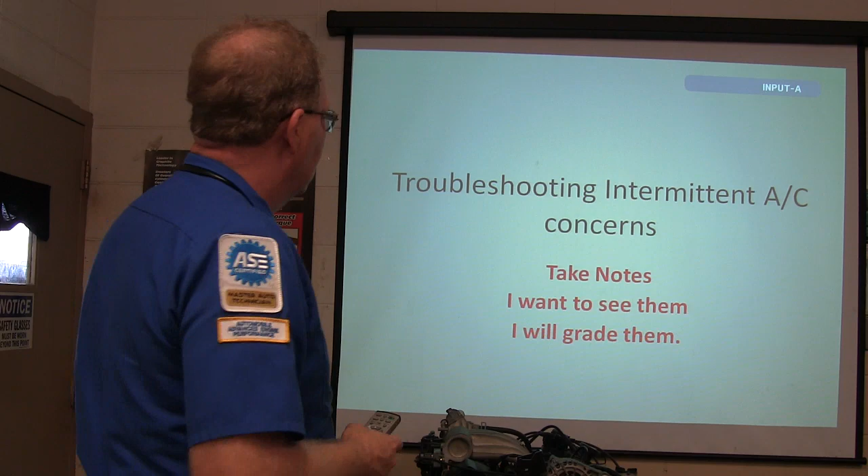This is air conditioning day, so we're talking about troubleshooting intermittent AC concerns, a lot of little tips and tricks and all that.

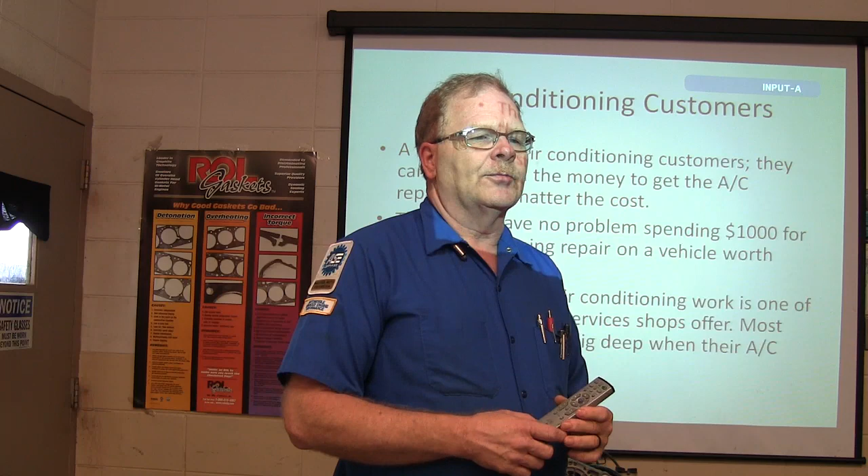The thing about air conditioning customers, they can always find the money to get the AC fixed. You know what I'm saying? Typically, they often have no problem spending $1,000 for an air conditioner repair on a vehicle worth $800. Now, the bottom line is air conditioner work is one of the most profitable services shops offer. Most customers expect to dig deep when their AC system acts up. Now, we don't want to ream people out for the bill or anything like that, but for the most part, people want their air conditioner working, and you can fix their AC.

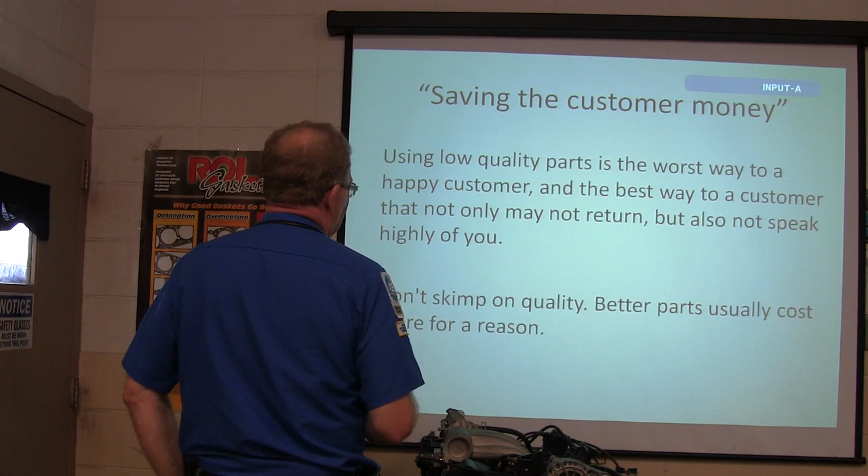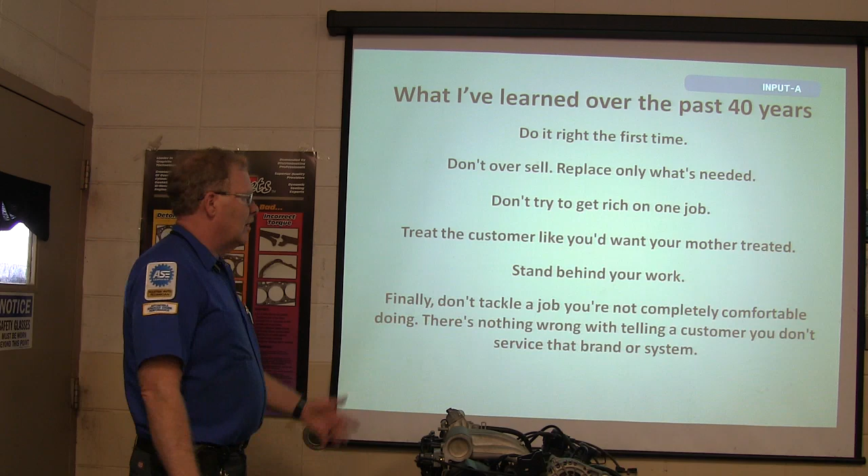Now, do it right the first time. Don't oversell. Replace only what's needed. There are some people that want to replace every doggone thing on there, just to make sure that they cover themselves. Don't try to get rich on one job. Treat the customer like you want your mother treated. Stand behind your work. Don't tackle a job you're not completely comfortable doing. There's nothing wrong with telling a customer you don't service that brand or system. Just don't be afraid of that.

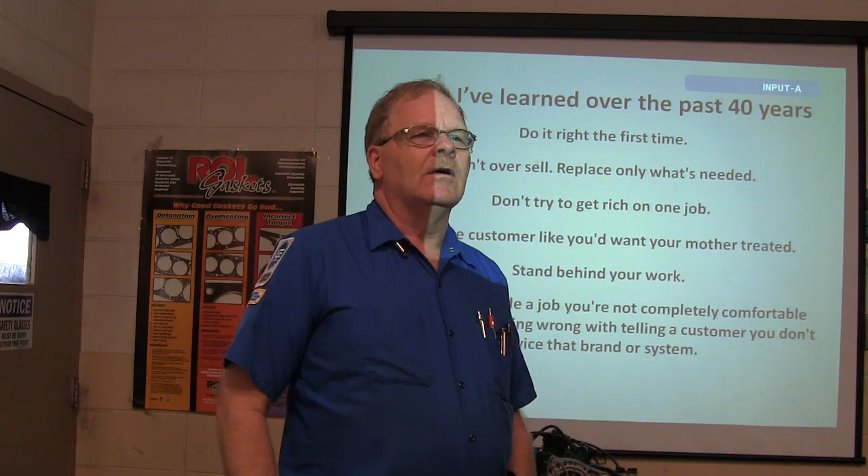Here's something else. If the air conditioner has a leak, I have never seen one get better. It's not going to stop leaking until somebody fixes the leak, right? So it ain't going to get better by itself. Also, if you want to make sure that you're going to have trouble with your air conditioner, spend a heck of a lot of time in a hot parking lot idling with the air conditioner on. It's a bad scene, it's hard on the system.

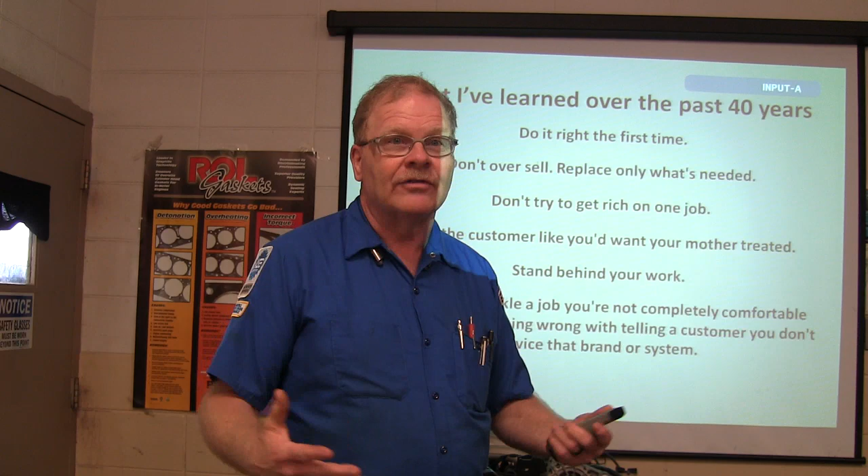People are still writing. Note takers are good, they are our friends. Katie, did you write 2 words?

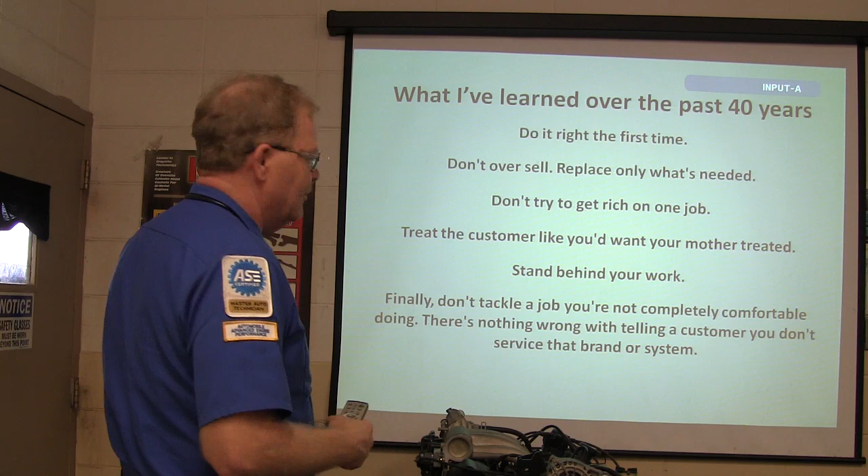All right. Well, none of us know what the future of automotive air conditioning will be, but you can bet air conditioning will be a part of transportation for years to come. That R-1234yf refrigerant is coming out on a lot of new cars now. And it's really expensive. You got to have different equipment to use with it, and it works a slightly different way, and so on and so forth.

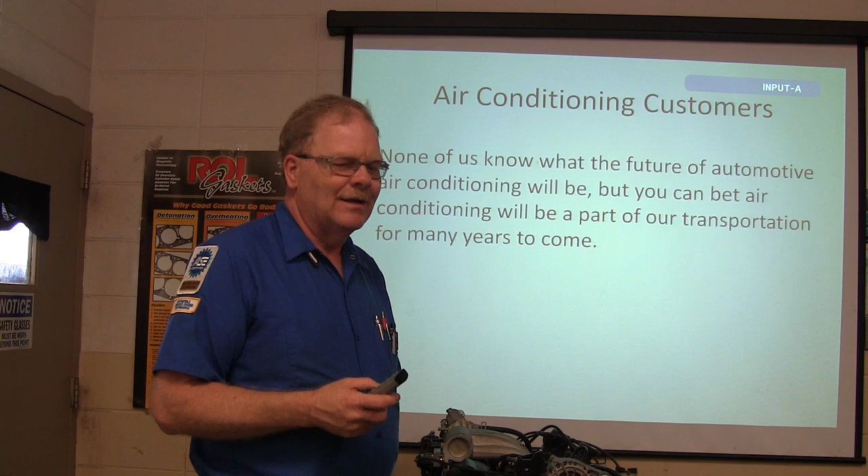Now, some of the systems that I have read about keep it out of the passenger compartment: they actually cool some coolant with the air conditioner and run that through sort of like a heater core, but it's a cooler core in there. There's probably more than one way they do it, but I'm just talking out of my head on that for now. Before you tear into a dashboard, how many of you have pulled a dashboard out?

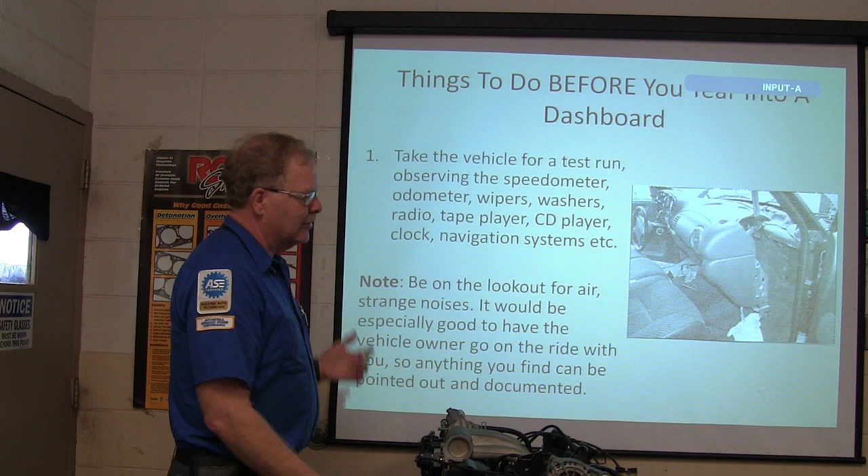You got that Jeep, you got that thing all the way back to the bulkhead and all that. Take the vehicle for a test run. Observe the speedometer, odometer, wipers, washers, radio, tape player, CD player, clock, navigation, everything you can, because you're going to pull the dashboard out, it's going to be really intrusive, right? So let's say you drive the thing and you found out that the tape player doesn't work right, or the CD player doesn't work right.

If you write that down before you ever tear it apart and make a note of it, then you're going to be able to come back and say, look, I noticed. Even before you tear it apart, you might want to call the customer and say, look, I noticed your CD player is not working right, you might want to think about replacing that. Because a lot of the times if you tear into one and put it back together, they come back and say, hey, my CD player is not working right. See what I mean?

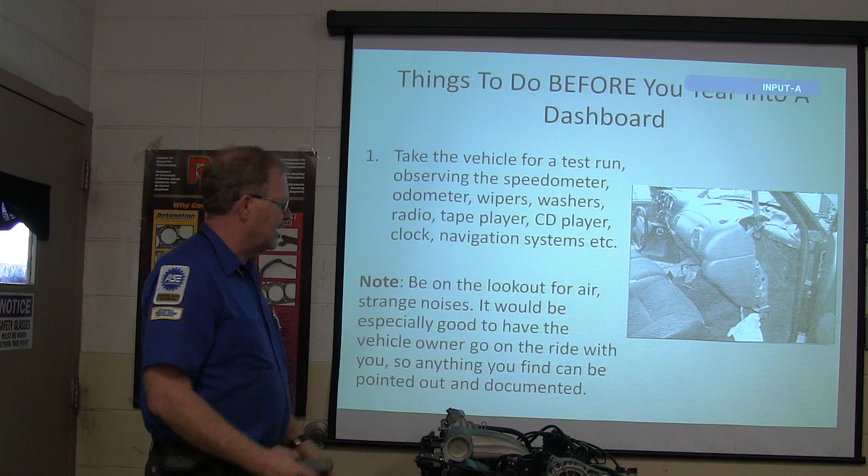So be on the lookout for air, strange noises. It would be especially good to have the vehicle owner go on the ride with you so anything you find can be pointed out and documented. So you're riding along with the customer and say, I noticed this doesn't work right, I hear a rattle in the dash over there, maybe we see about that, no guarantees and all that. You pick out the stuff that they're liable to come back and hit you with.

Because there are a lot of those people, a lot of these folks around here, they'll say it's just like it was if it's not fixed. Or they'll say, this wasn't like that before. That's one of the things.

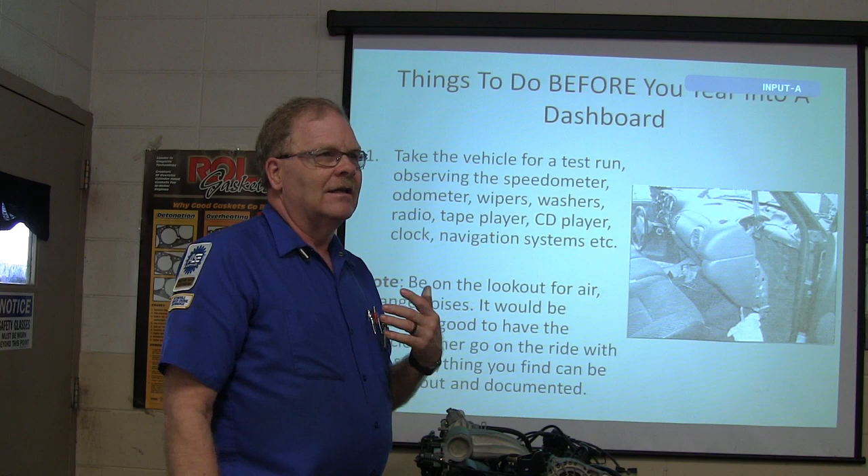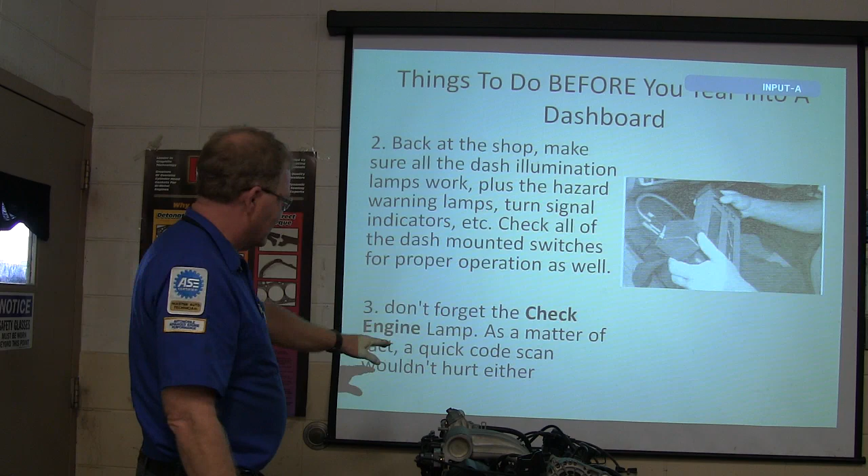So back at the shop, make sure all the dash illumination lamps work. Throw the cloth fender cover over your head and make sure that you can see the dash lights. Make sure all of that stuff works. Check the dash mounted switches for proper operation. Don't forget the check engine light. A quick code scan wouldn't hurt. Write all that stuff down, put it on the back of the ticket. Make darn sure that you got yourself covered.

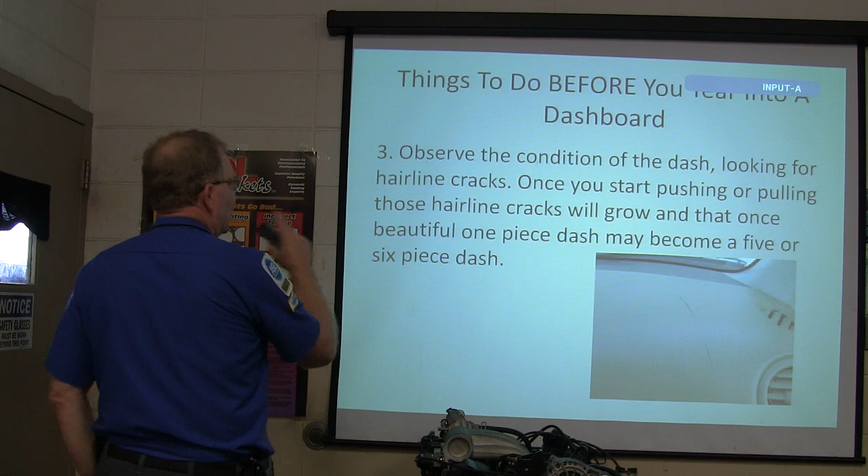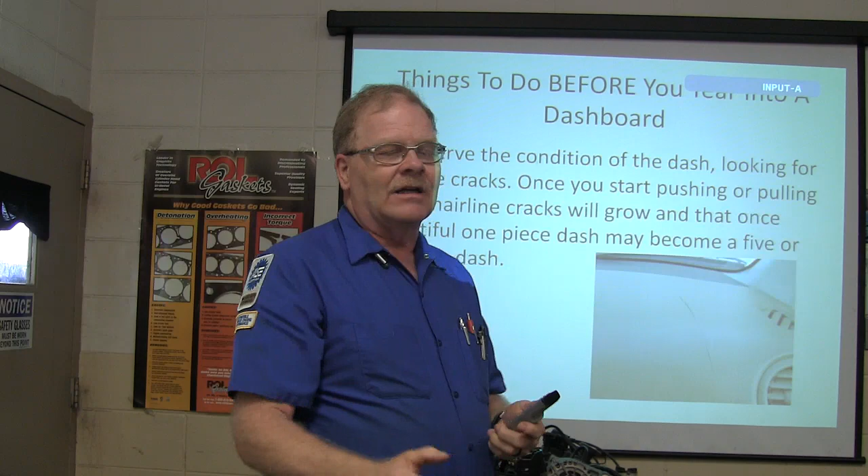Observe the condition of the dash. Look for hairline cracks. Once you start pushing or pulling, those hairline cracks will grow. If you got a little crack in the dash already, when you start twisting around on that dash, that crack will get bigger. So you want to point that out too: got a hairline crack right here. You cannot get trim parts for a lot of these older vehicles. Even if it's 7, 8 years old, ain't no trim parts available for it. So just make sure that they are sure.

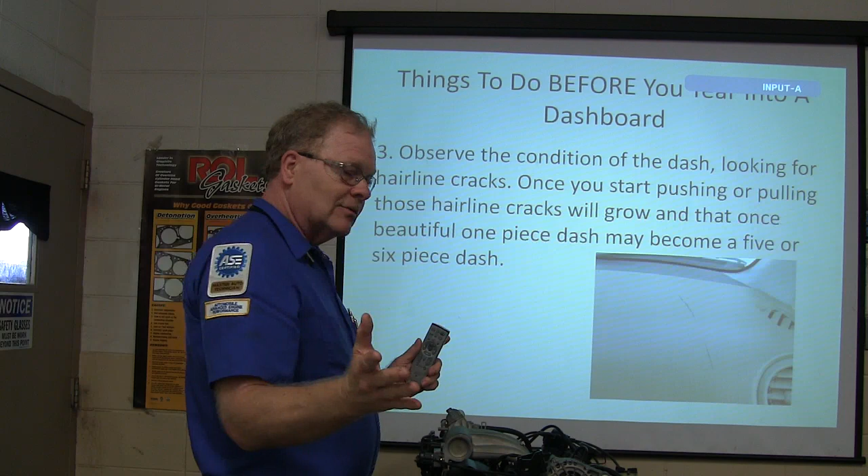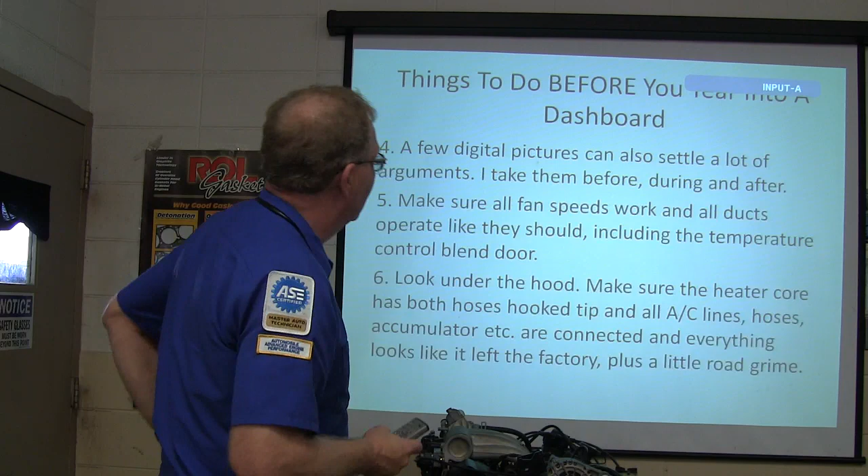If you got a little crack in the dash, when I start pulling this out, this is liable to get worse. I just wanted you to know about this going in, right? A one-piece dash might become a 5 or 6 piece dash. I got a lot of that stuff from Glenn Farrell. He's really good. Digital pictures can settle a lot of arguments. He takes them before and after: this is what it looked like before I started, this is what it looked like after.

Make sure all the fan speeds work, the ducts operate like they should, including the temperature control blend door. Look under the hood, make sure the heater core has both hoses hooked up, and all AC lines, hoses and accumulator are connected. Everything looks like it left the factory, plus a little road grime. So basically, you want to know what kind of shape this thing's in to start with, so you don't get in trouble later.

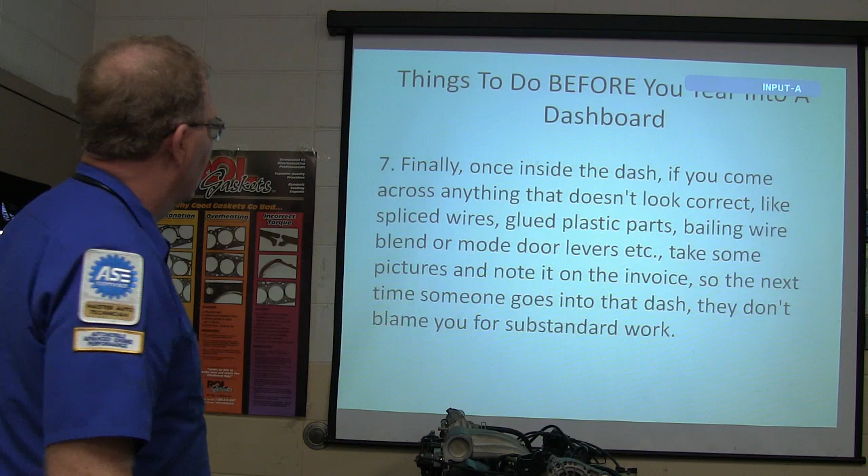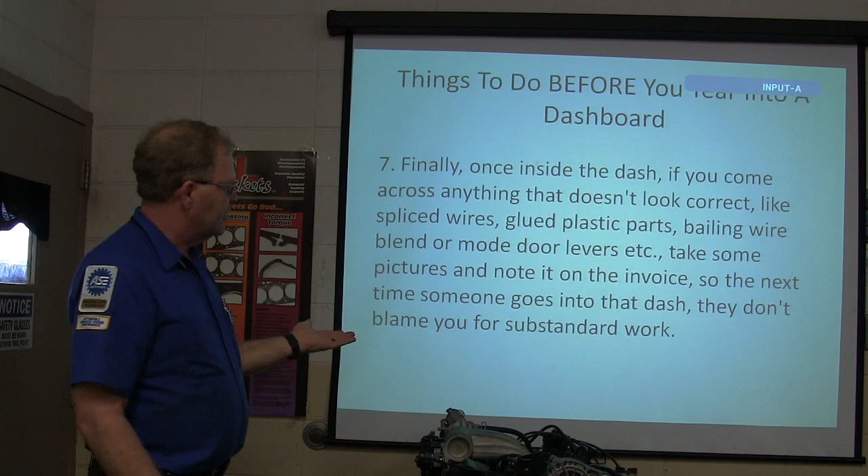Now, once inside the dash, If you come across anything that doesn't look right, spliced wires, glued plastic parts, baling wire. Actually, that's misspelled. Blend door or mode door lever. Anything that's not working right or doesn't look right, make a note of it on the invoice, so the next time somebody goes into the dash, this stuff was already like that. These few steps might take a few extra minutes, but they may save you wasted hours and big bucks at the end, and maybe a sleepless night or two. All right?

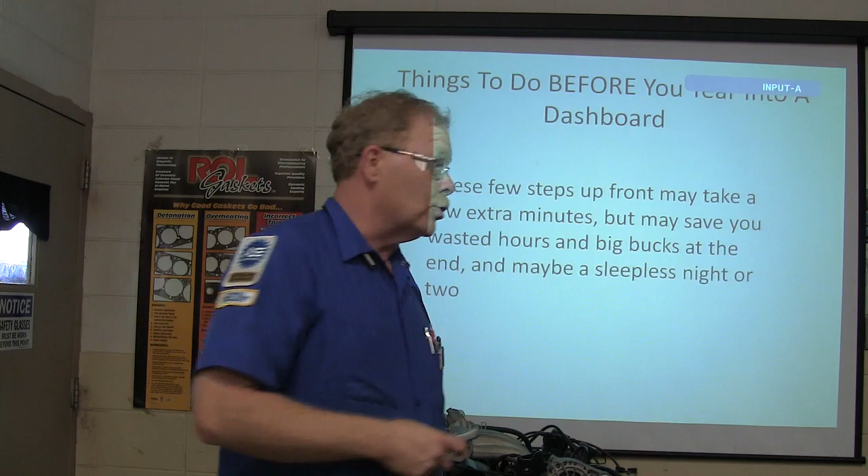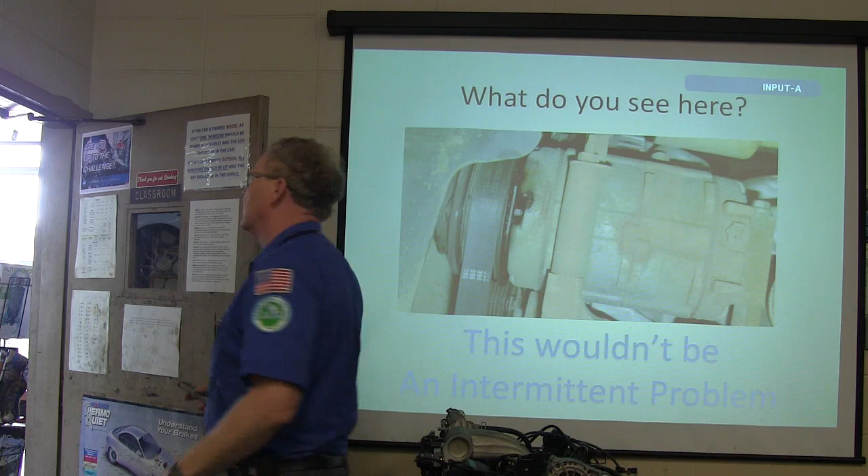Hey, now what was you telling them? Oh, what I was telling them, they're gonna give me a PO just as soon as she gets it, and then I'll give you all the PO. All right. She brought your brake parts here.

Okay. All right, this wouldn't be an intermittent problem. What do you see here?

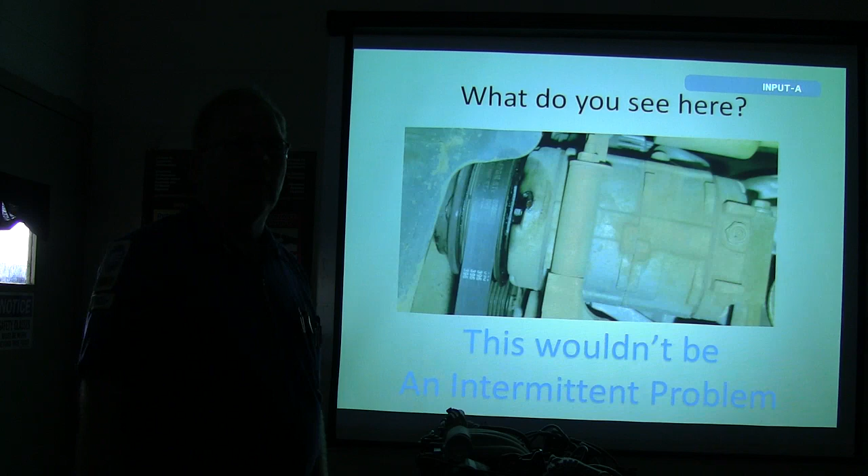What do you see? Anybody see anything? A lot of crud in that clutch. Sir? A lot of crud in the clutch. You talking about this stuff right here? Yeah. That means the clutch is burned out. Now, that's not going to be an intermittent problem, okay? That's just one of the things I wanted to point out.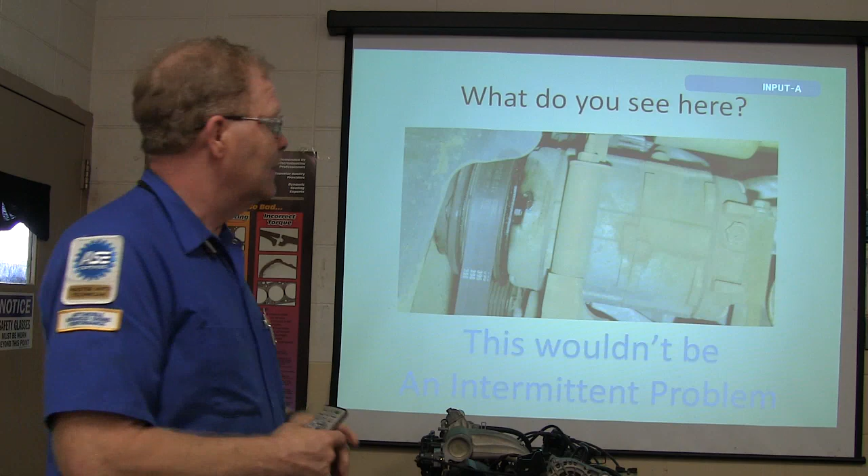So, we can all get calls where the AC system gets ice cold and quits cooling anywhere from a few minutes to a day or more. Now, here's the question. If it gets ice cold to start with, does that mean it's low on refrigerant? Probably not, right? Like the toothache that goes away, most of these intermittent problems go away with the vehicle reaching the shop. And so you're going to have to figure out your way to smoke that out. One of these 4 things is usually the problem. This doesn't mean this is always what's wrong, but one of these 4 things is typically the problem.

Either the clutch relay, pressure sensor. Who's seen that recently? Did you hold your hand up? No. Be careful when you're at an auction, you just bought a tractor, okay? But who's seen a pressure switch? I think I did. On what? It was on that car. The Cadillac. Yeah, right? It was a crossover, right?

Clutch coil. A clutch coil usually will be an all the time deal. It won't be a sometimes deal. However, the air gap on the clutch can be an intermittent thing, and usually is. Blend door. Blend door is what gives you your warm and your cold. It's what moves when you turn the knob from left to right.

See, mine don't have that problem unless my cable snaps. I have a cable on mine. Yeah, you got a cable. Or the door in the dash breaks or something like that. Sometimes it may take an hour or more for the problem to show up.

Now in this case, you're supposed to work smart, right? So if you've got one that you're going to have to play a waiting game with, put your gauges and all that stuff on there, like you're going to be measuring your temperature and everything. And then get a different car and be working on that while this is going on. Don't be over there sitting around with your feet propped up playing on your phone. The boss comes and says, "What the heck are you doing?" "Oh, I'm waiting for this car to act up." "Well, get another job and start working on it." You gotta work smart. It's best to be working on 2 or 3 or 4 jobs at one time so that you can always have some money flowing, right?

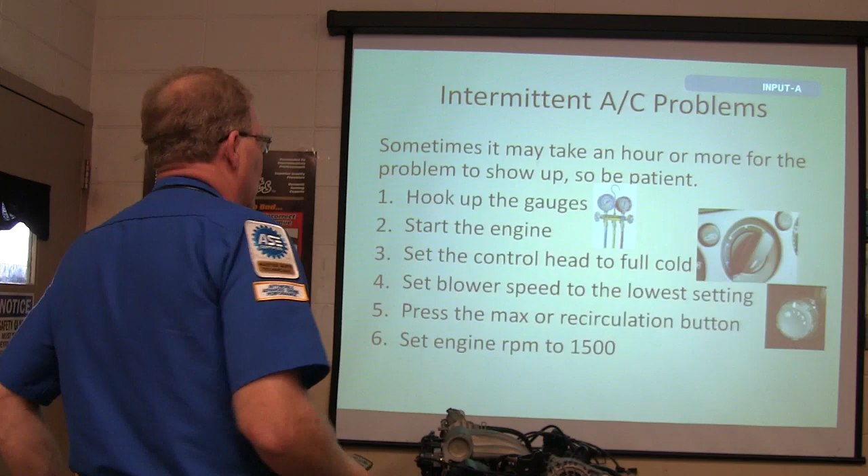Okay. One time I had a student in here, we had the Mercury Sable sitting over there in that middle service bay, that flat stall. And I said, bring it up to 1500 RPM, in an old car with a lot of miles on it, and hold it there, and we're going to watch these oxygen sensors. And so he went all the way to the floor, and then was going to come back to 1500, and the gas pedal stuck under the floor mat, and he threw 2 rods out of the car, sitting right there. Kind of like a bomb going off.

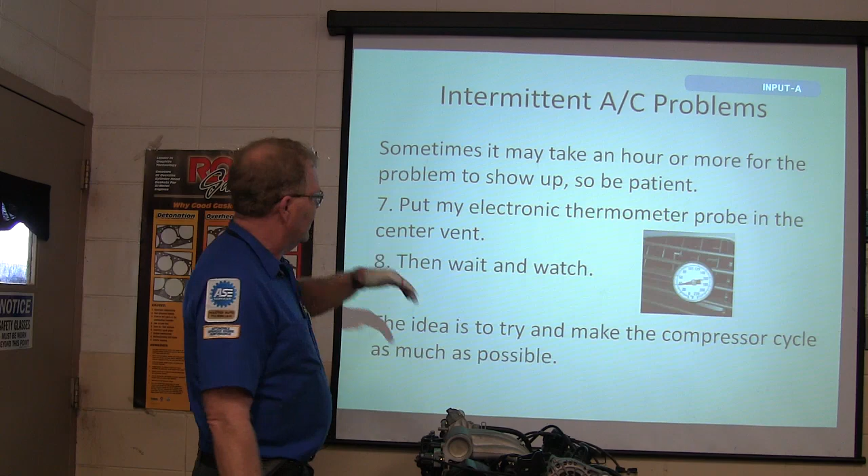And we had to build another motor for the Sable. Right? All right. It may take an hour or more for the problem to show up. Put the electronic thermometer probe in the center vent. It doesn't have to be electronic. You can use one of these little kind here. Wait and watch. Try to make the compressor cycle as much as possible.

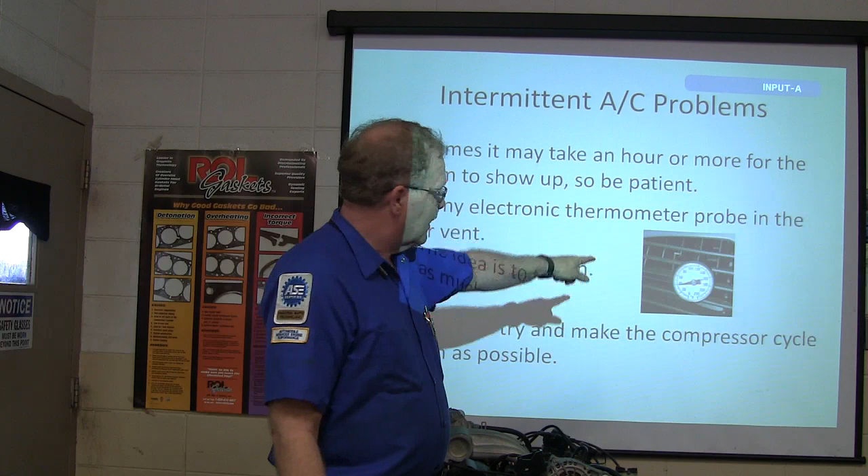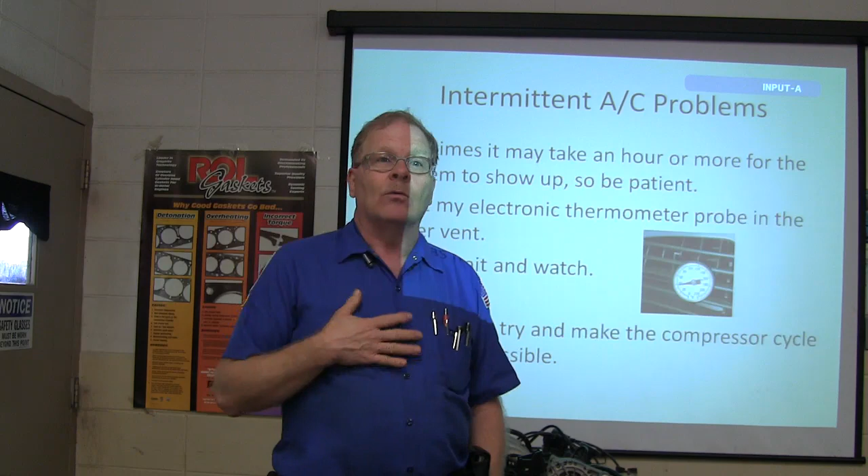Now, there was a girl in here from New Brockton that was in the program one summer, and she had a Dodge pickup, and it would freeze up. This would get colder and colder and colder. It would never cycle the compressor off. So what do you think's going on there? Something off the top of your head. What causes the compressor to cycle off? Typically, what's the trigger for cycling the compressor?

Pressure switch. The low pressure cutout switch is basically when the pressure goes below a certain point. See, pressure and temperature are correlated in there. Pressure goes below a certain temperature, that low pressure cutout switch is supposed to either send a signal to the engine controller, or back in the day they'd actually run the power of the compressor through these switches. Long and short of it is, her low pressure cutout switch was stuck. It was never open. If the compressor clutch relay terminals were welded together, they do that same thing.

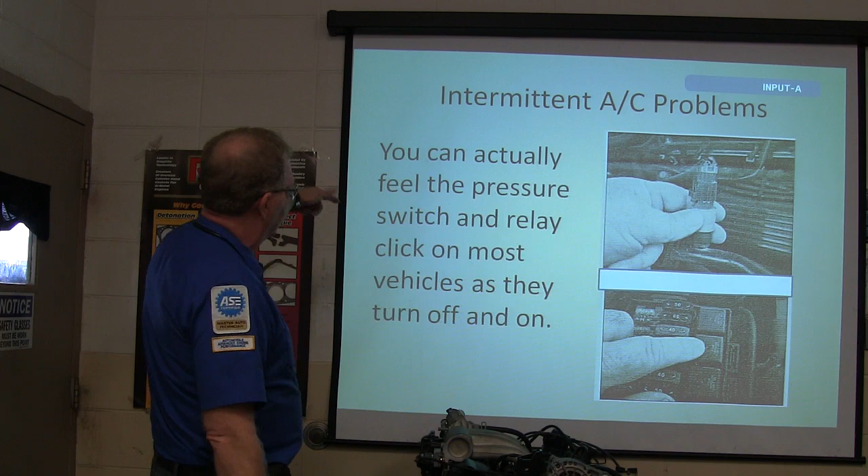Try to make it cycle as much as possible. You can actually feel the pressure switch and relay click on most vehicles as they turn off and on. Put your fingers on that, you'll feel it click. Or the relay. Put your finger on the relay, you'll feel it click. Pay attention to that.

You okay over there? All right, then.

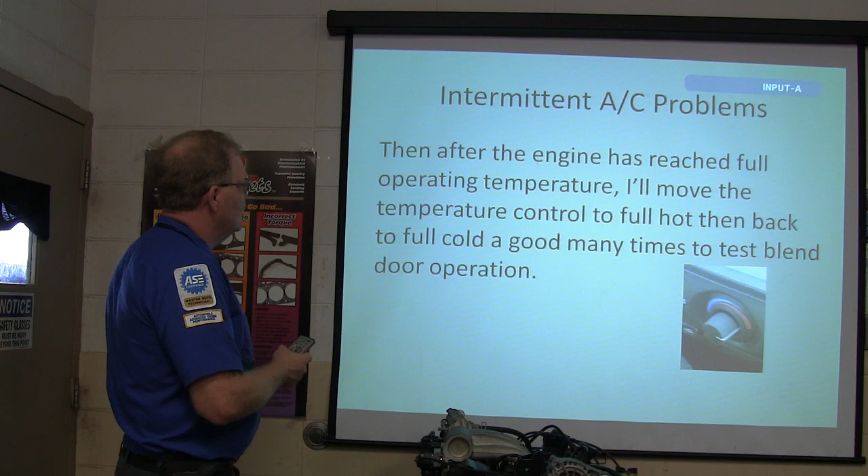After the engine's reached full operating temperature, move the temperature control to full hot, and then back to full cold to test the blend door. You want the blend door to sweep back and forth and see if it ever hangs up. I go hot, hot, cold, cold, hot, hot, cold, and it stays hot. We got a blend door problem.

And you can also pinch one of the hoses. You need to make sure it's the one going into the heater core, and not the one coming out of it. Pinch the one going in. If it's blowing hot, the suction line's cold and all. If you pinch that, it starts to cool off. You'll know you got blend door issues because you shut off the hot water going through there. Got it? All right.

As soon as the vent temperature starts to rise on the full cold setting, see if the compressor's running. If it starts to get hot air, I'm going to go out here and see if the compressor's still spinning. If the compressor's still spinning and you lost some of your airflow, what do you think that is? Let's say you got a frosty cold suction line, a good hot condenser, a good hot liquid line, discharge line, but you're starting to lose your cooling, and you're also starting to lose your airflow.

I want you to think. Critical thinking skills are important here. What do you think it may be? Everybody's real quiet. Compressor's still running, everything's still cold, you're losing your airflow, it's starting to warm up in there. I would say the evaporator's turning into a block of ice, because the water that was sweating on it like a glass of tea is starting to freeze.

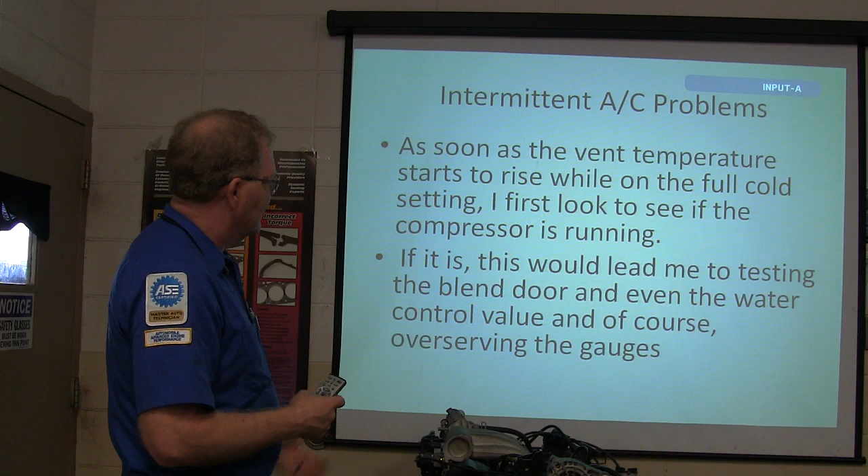This is another thing you can look at: if that suction line has got a lot of ice on it, usually that means there's a problem. It ought to be sweaty, but typically it's not supposed to be froze up. Might lead me to test the blend door and even the water control valve. But just watch the gauges, make sure that you know what's going on with your pressures too.

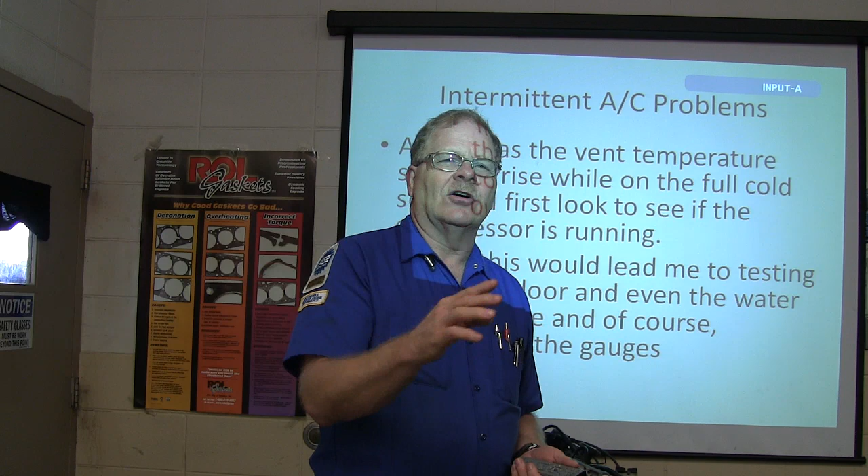Whenever it's operating like it should, the pressure is going to be on the low side about 30 roughly, and on the high side it's going to be between 200 and 250. Now that pressure on the high side will be higher if you're in a situation where the ambient temperature is higher.

In other words, if it's a hot day, both of those pressures will be higher, because pressure and temperature have a lot to do with that. Now, I've got a video about this on my YouTube channel. We had a little Nissan out here, and it would start squealing the belt a little when you turned on the AC if it was sitting still.

So let me ask you this: it starts cooling real good, and then the belt starts squealing. It froze up and locked it up? Huh? It froze up and locked the cooler? No, it's not going to do that because of freezing up. But what you did have was not enough airflow across the condenser because the fan clutch went bad. This is a little fan clutch.

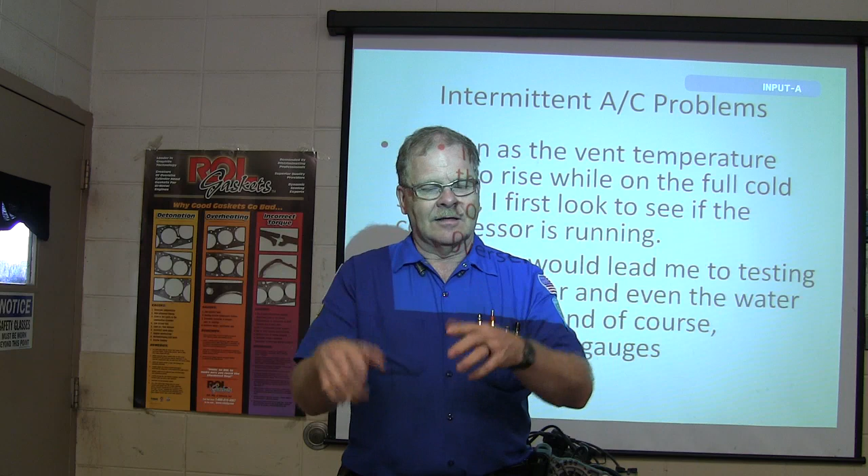And so how did we determine that was a problem? We dragged one of our little fans over here and we put it in front of the condenser. We let it blow through there, and those pressures came down and they stayed sweet. And the compressor never squealed. See, the head pressure was going up really high because the condenser wasn't getting enough airflow because the fan was never locking in.

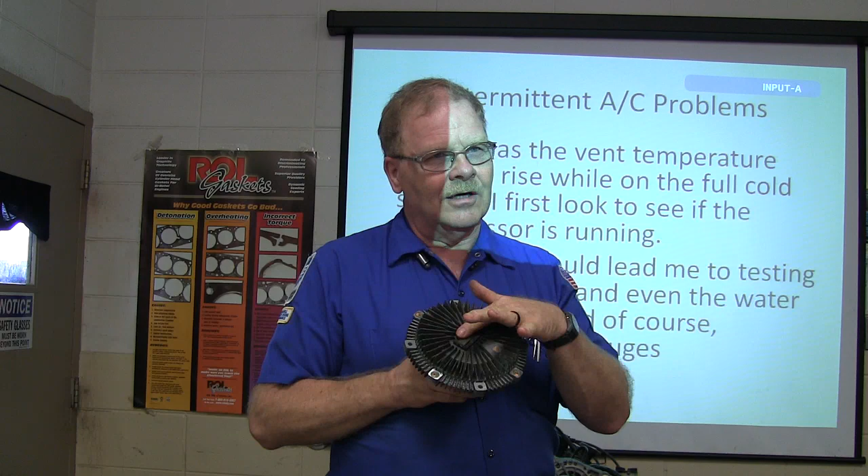The temperature coming through that condenser is supposed to cause that fan to get harder to turn. And there's a little bimetal; it'll either be a coil spring or, this one here, it's got a little thing. If you heat that up with a torch, you'll see that change in shape. Then when you let it cool off, it goes back like it was. That's what a bimetal strip does, because it's got two kinds of metal that expand at different rates.

That's another story. If the compressor isn't engaged, I either tap on it or jump the pressure switch. Then tap or jump out the relay. Sometimes you pick the relay, and if it kicks on, you've got a relay issue. Swap it out with another relay. Don't do this unless the relays are exactly the same part number. If you just jerk relays with reckless abandon and swap them around, you may be putting in a relay that's going to burn up something. Make sure the relays are just alike.

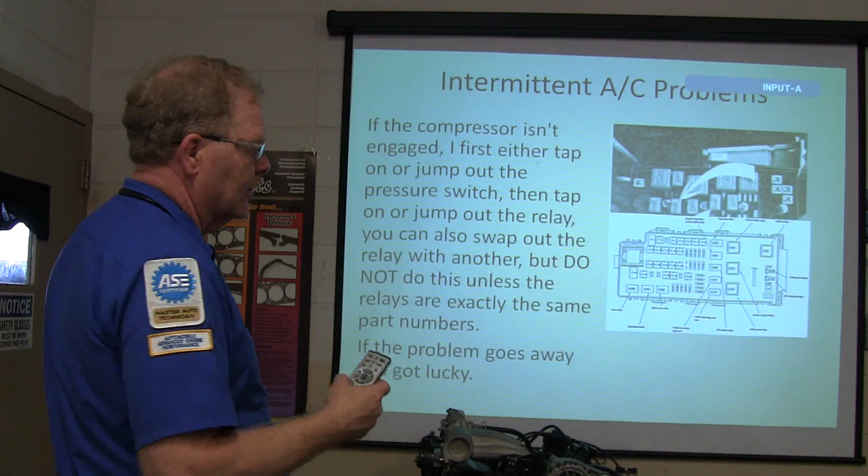Like that one time with that lady's Nissan Altima: her blower wouldn't come on for 5 minutes after she started the car, and then it would kick on. What we did was take the blower relay and the rear defrost relay and swap those around, and she had instant blower. Those little potted relays are like that. A lot of times they don't operate exactly. They give different kinds of problems than regular electromechanical relays. You get lucky sometimes when you swap the relays and find out what the problem is.

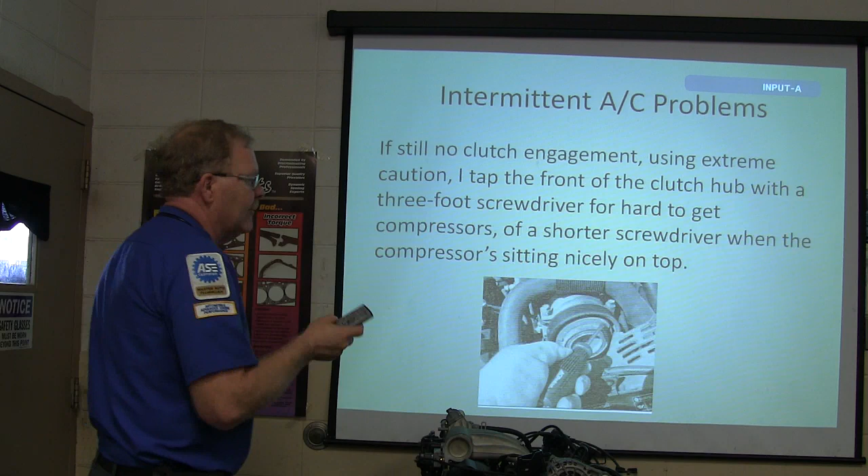All right, if no clutch engagement, use extreme caution. Tap the front of the clutch if you can get to it. Sometimes it's down under and you can't get to it. But make sure you don't tap it if it's spinning this way and you tap on it that way and it starts spinning. It's liable to throw the screwdriver back at you. But if you tap on it the way that it's spinning and it clicks in, and it runs until the next time it clicks out, that's an air gap problem.

And the air gap can be adjusted on most of them by taking the pulley off and taking some shims out to get it closer. About 20 thousandths of an inch or something like that. All right, if the clutch engages doing either one of these taps or tests, you found the cause. You've got to know what to tap on, tap on the switch, just a little. Now don't hit it with a hammer.

That's what mine looks like. Huh? That's what mine looks like. Yep, that's right. I did that 4.3. I took a picture of your truck when you had it over.

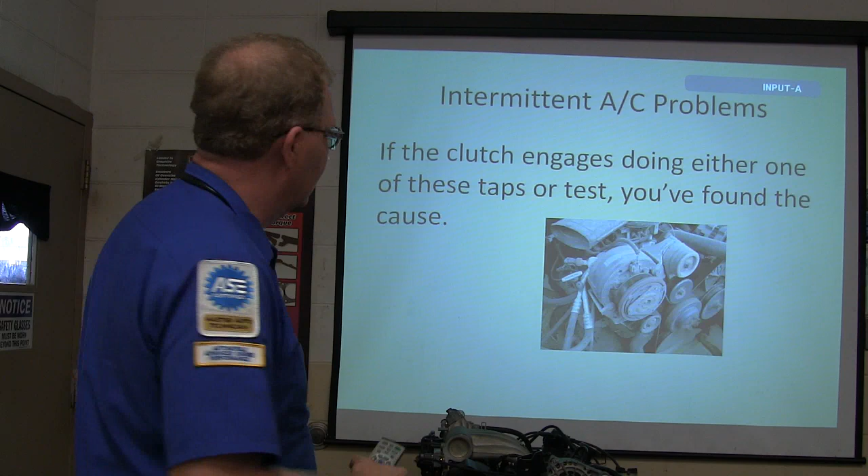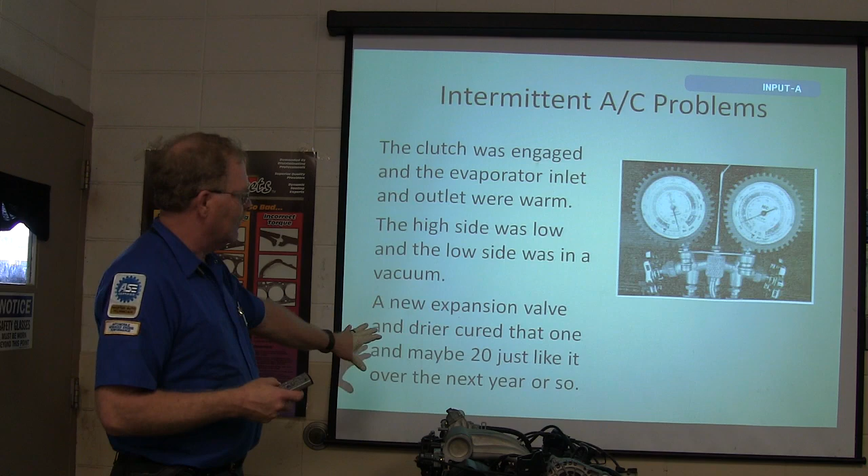It's a 4.3. Yep. The clutch was engaged, and the evaporator inlet and outlet were warm. The high side was low, the low side was in a vacuum. The new expansion valve and drier cured it. See that? Maybe 20 just like it. Now I've actually seen it work.

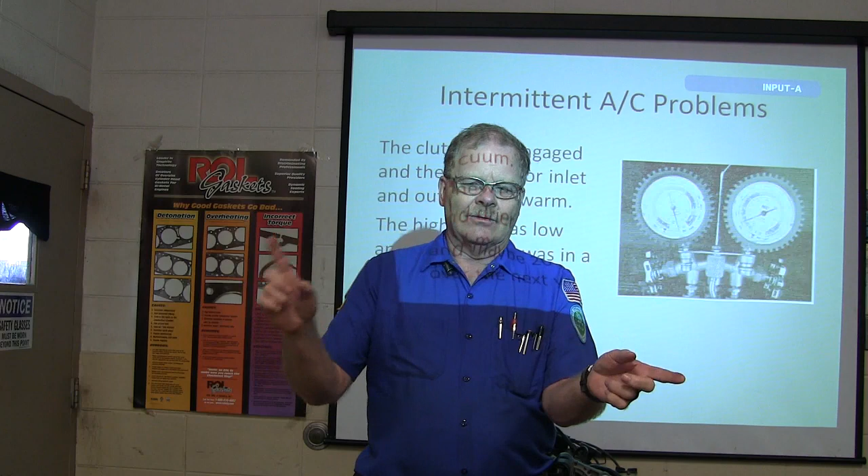One time we had a little Toyota, and we had both pressures low. I mean, we had plenty of refrigerant in it, but both pressures were low. It was real low on the low side, and it was a lot lower than it should have been on the high side. And so we put an expansion valve in it.

And the expansion valve was in there behind the glove box.

You guys listening? Yeah. All right, don't threaten to slap her with your dirty hand.

Okay, right here, we've got this expansion valve we replaced, and typically that takes care of it. Well, when we fired everything back up, it didn't cool like it should. So we went ahead and pulled it back apart, put an evaporator in it, and that fixed it. Not exactly sure what was going on with that one, but sometimes you run into crazy stuff like that.

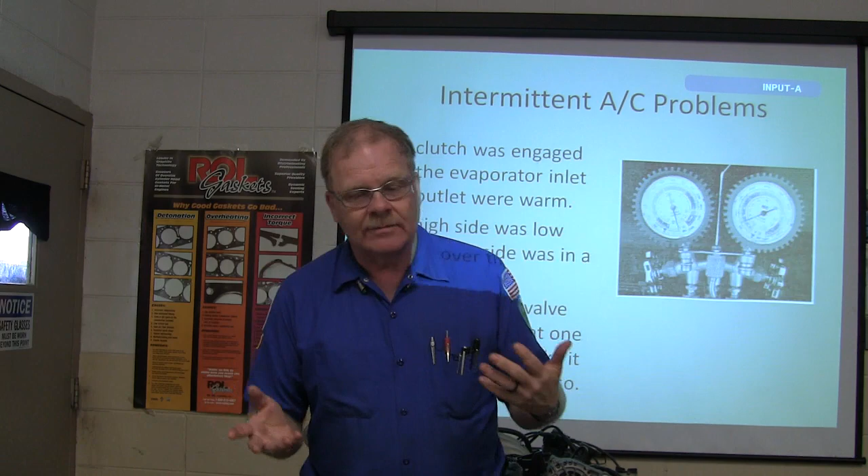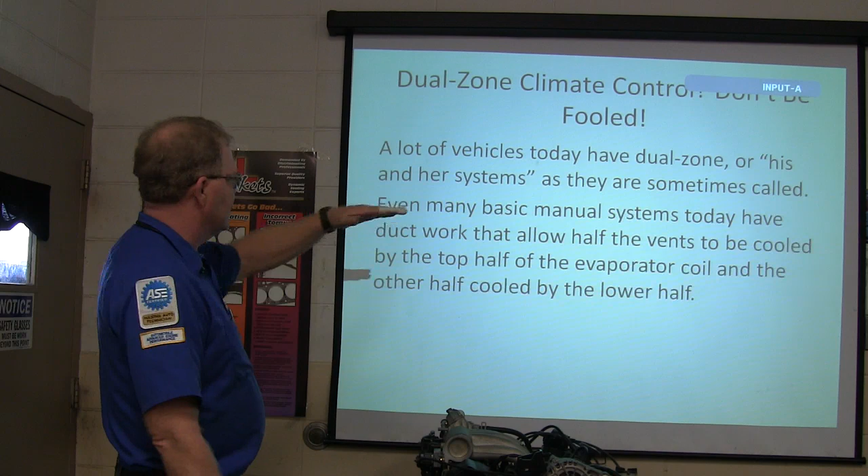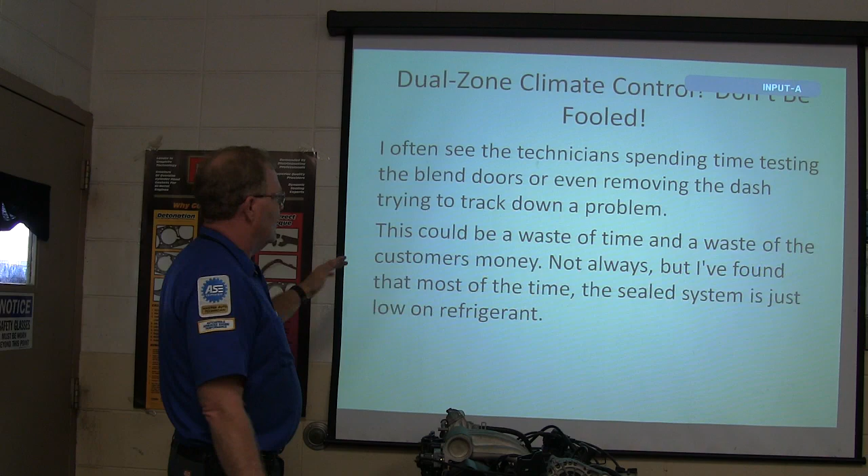All right. A lot of vehicles have dual zone or his and her systems. Sometimes these basic manual systems have ductwork that allows half the vents to be cooled by the top half of the evaporator coil and the other half to be cooled by the lower half. So a lot of times technicians will spend time testing the blend doors or removing the dash trying to track down a problem. Could be a waste of time and cost money. A lot of the time, the system is low on refrigerant.

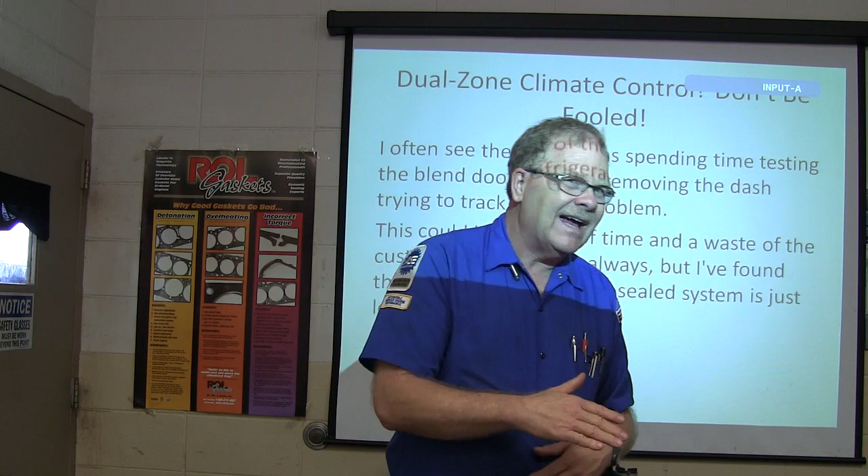Now, if you've got one that's blowing warm over here and cold over here, first thing I want to do, let's just see how much juice is in it. Remember, you can't tell by looking at the static readings how much is in there. It may have 100 pounds on both sides, but what you capture in the recycling machine, if you're watching the scale, is going to tell the tale. If it's supposed to have 1.8 pounds in it, and you're pulling out 0.9, then you know it's half out of juice. And that'll make it blow cool on one side, warm on the other.

Now you remember on Judy's vehicle, that Edge, I let it run for 30 minutes, and it quit cooling. And we had low pressures all the way around, and you put an expansion valve on that one, and that fixed it, $16 worth, okay? All right, so that's how much the part costs anyway.

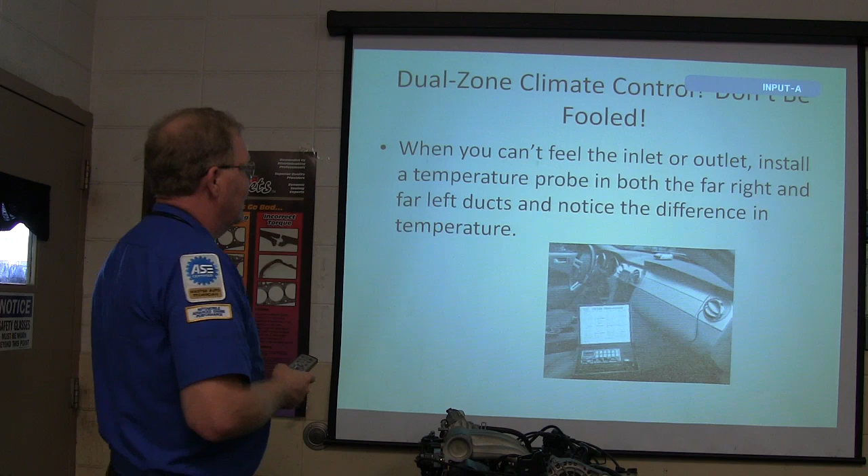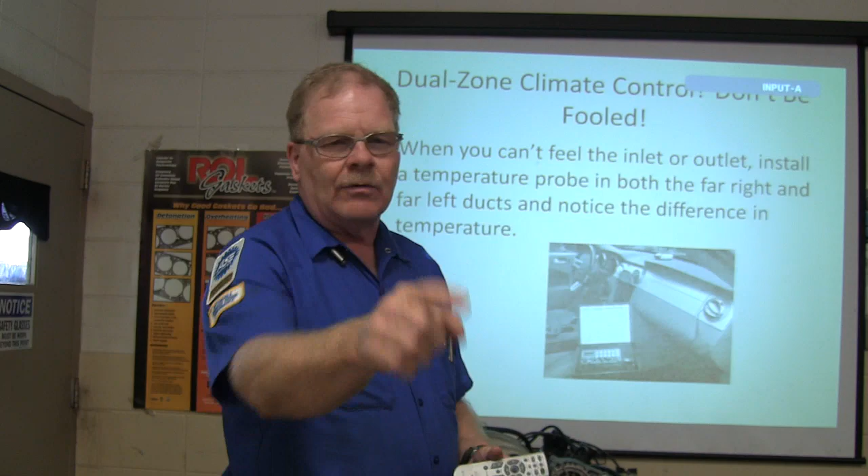When you can't feel the inlet or the outlet, install a temperature probe in the far right and far left ducts, and notice the difference in temperature. So put your temperature probe over here, put your other one over here. This one here is cooling down to 38, that one over there, it's up around 52. Start with your juice, okay? An electronic thermometer is needed for that, or 2 accurate mechanical thermometers.

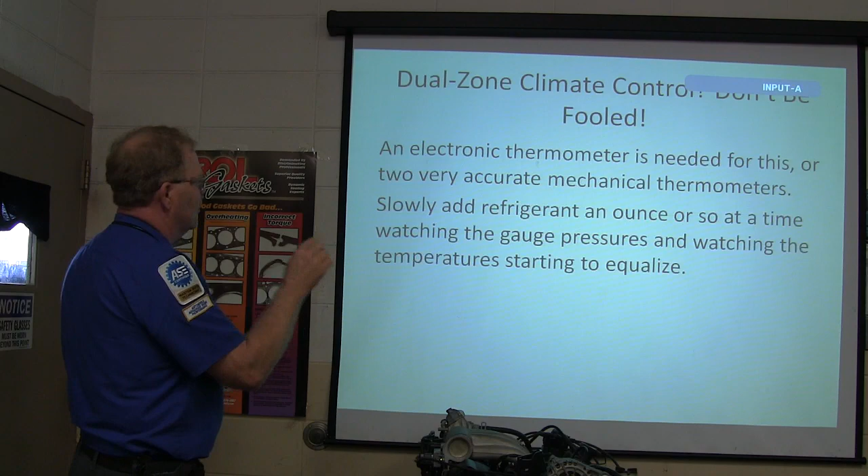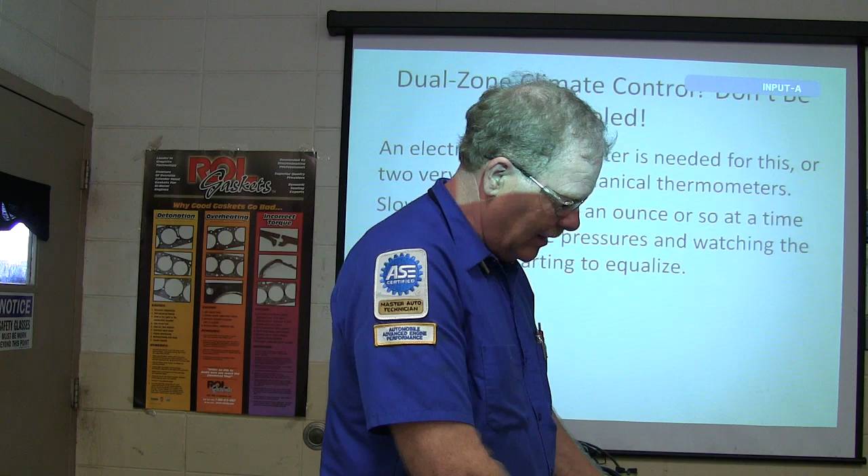Add refrigerant an ounce or so at a time, watching the gauge pressures and your refrigerant. What I like to do is pull it all out and put it back in there where it's supposed to go. And what he's talking about is, use the scale here. You got a scale you put your tank on, and then you just let some refrigerant go in there, and you can tell by looking at your scale how much you put in the system. I probably ought to get one of those scales here so y'all can learn to do it that way, because not every shop has a refrigerant recycler.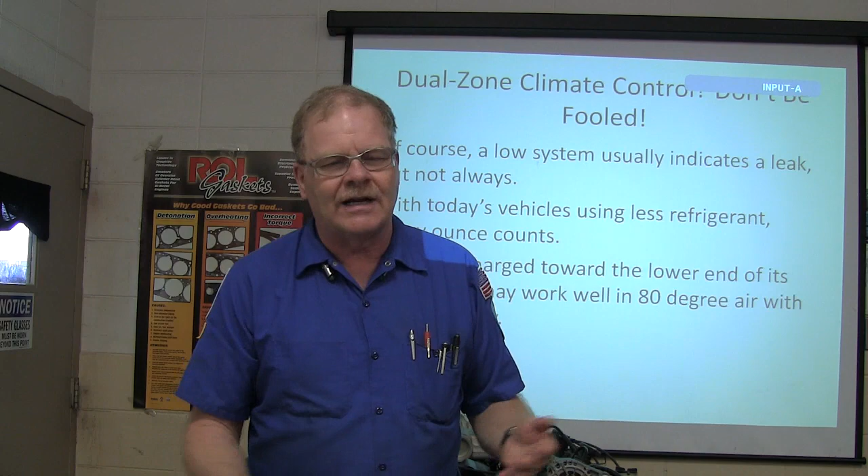A low system usually indicates a leak, but not always. Sometimes if this is an 08 model car and it's never had any refrigerant added to it, and it's a little bit low right now in 2018, if it's been 10 years, it may just need to be rejuiced. Today's vehicles use less refrigerant, every ounce counts. A lot of them don't take but about a pound of refrigerant. And that's good if it's a 1234 system that costs $80 a pound of refrigerant.

A system charged in the lower end of its spec range may work well in 80-degree air with 20% humidity. A lot of times somebody says my air conditioner cools just fine at night, but it doesn't cool worth a flip in the daytime. Look for low refrigerant in that situation too.

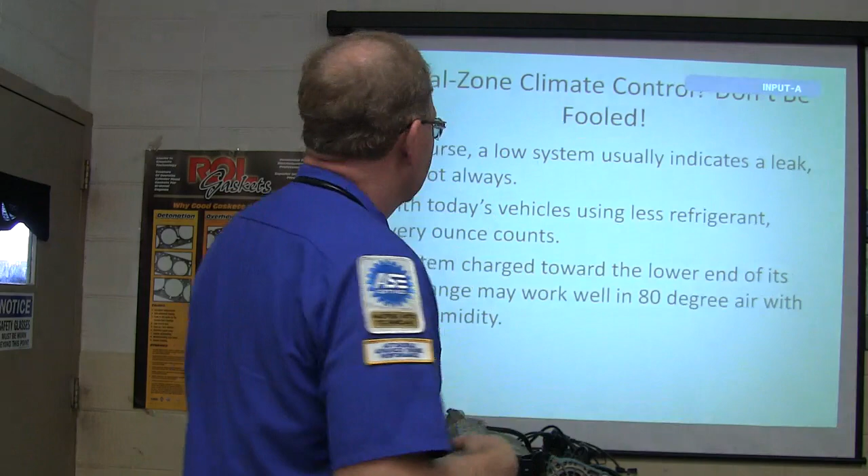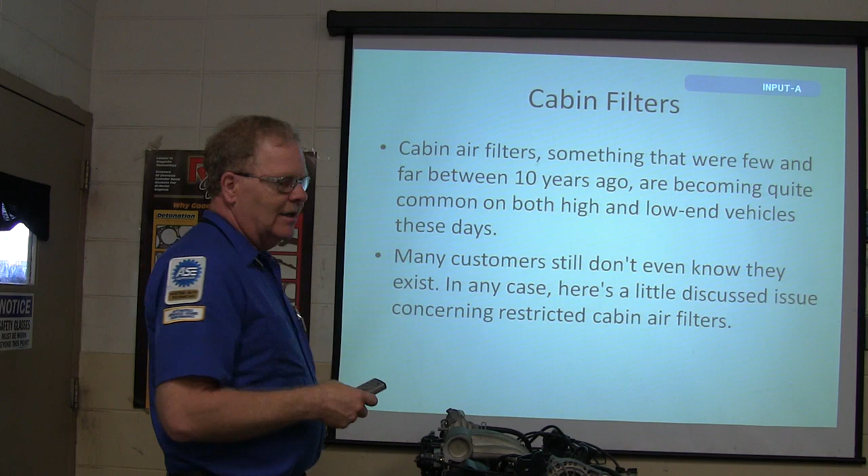Cabin air filters used to be few and far between. Real common on high and low end vehicles, but not every vehicle has one. Make sure you look it up. My Explorer, the 06 model, doesn't have one. They started putting them on Ford Contours in 1995, and Tauruses a little bit later. Many customers don't even know they exist. A lot of the time it can be behind a glove box or under that cowl out there, and you'll find it totally filthy with pecans, acorns, everything else. Low airflow out the vents: clogged cabin air filters can cause liquid refrigerant to enter the compressor.

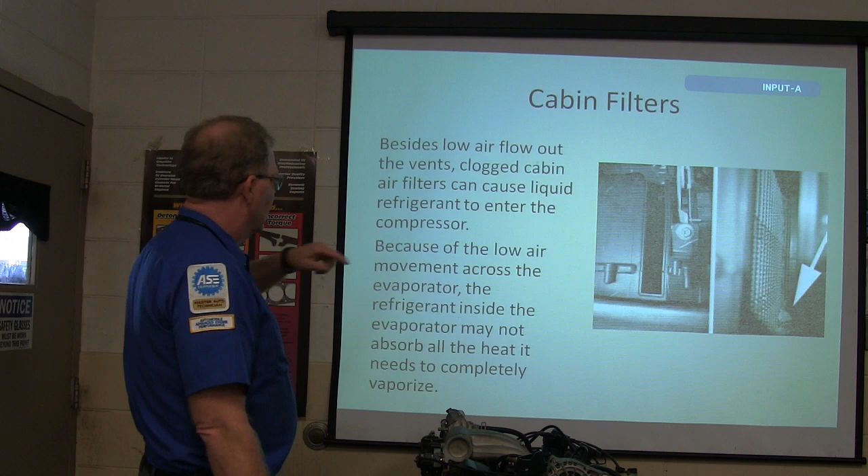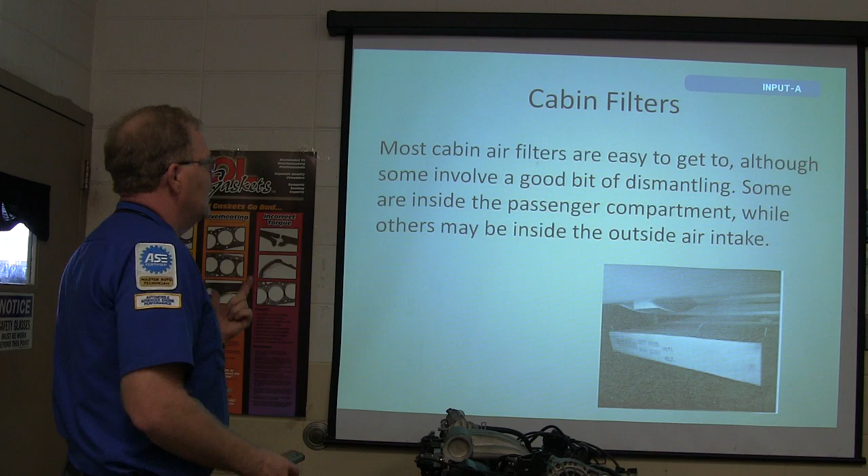That is a bad thing, because of the low air movement across the evaporator, refrigerant inside the evaporator may not absorb all the heat, and it may try to go in there. An accumulator will typically stop that, but if it's a receiver dryer system that's got an expansion valve on, you may have an issue with your compressor because of that. Most cabin air filters are easy to get to. Some involve a good bit of dismantling, and it depends on the vehicle.

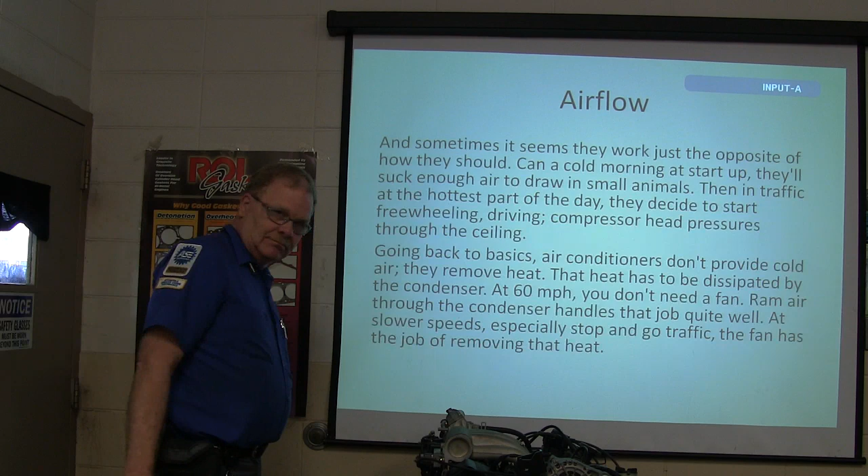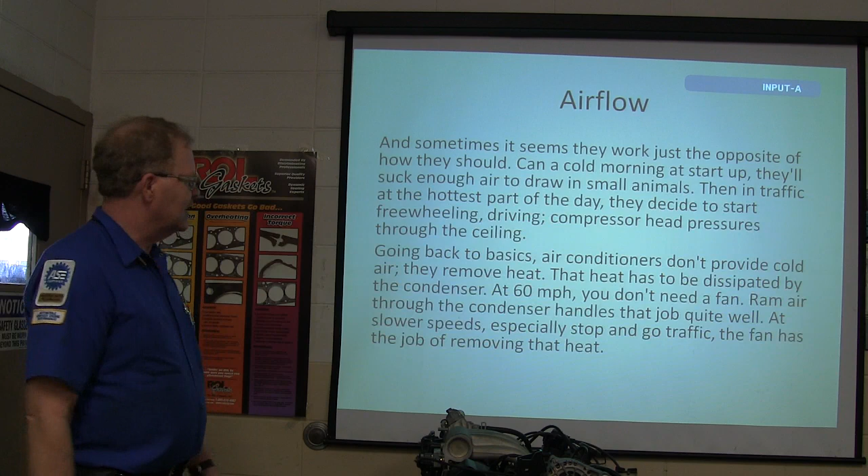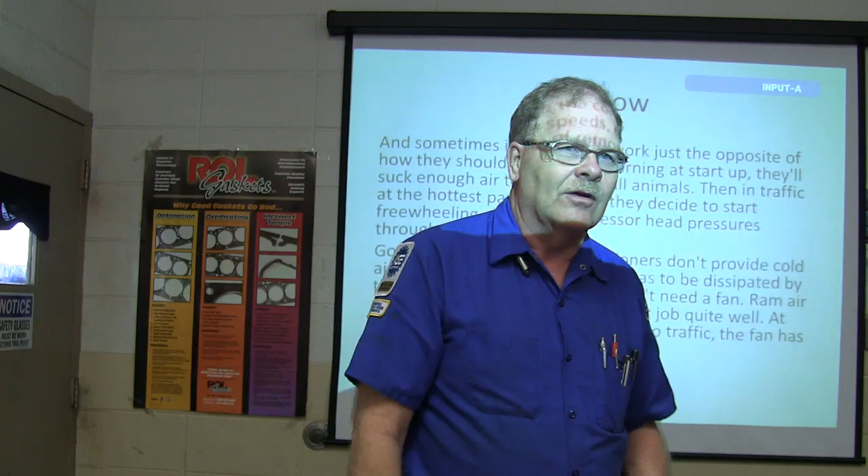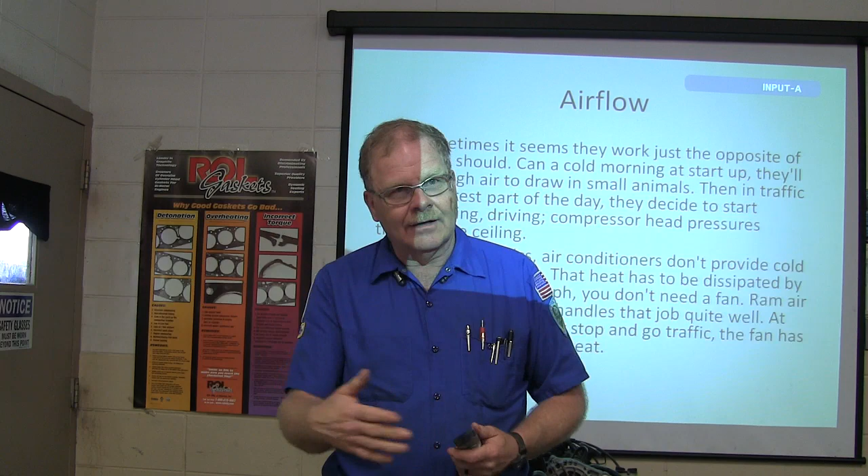Look though, those dog fennels and straw and everything can go right through that doggone condenser and get trapped in there between the condenser and the radiator. So you may not even see it. You may be looking through the grill and you may not see a dadgum thing. But whenever you pull the radiator back, you may see so much straw in there it makes you wonder how the thing was not overheating. And also sometimes you can very gently take your soap and your spray. If you've got all kinds of dust and dirt and everything, it's going to block airflow as well. So be careful with that. Blowing that out right here.

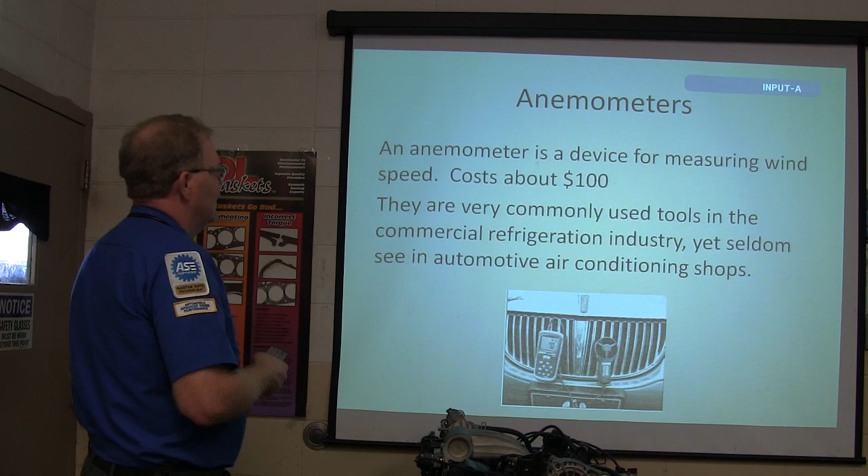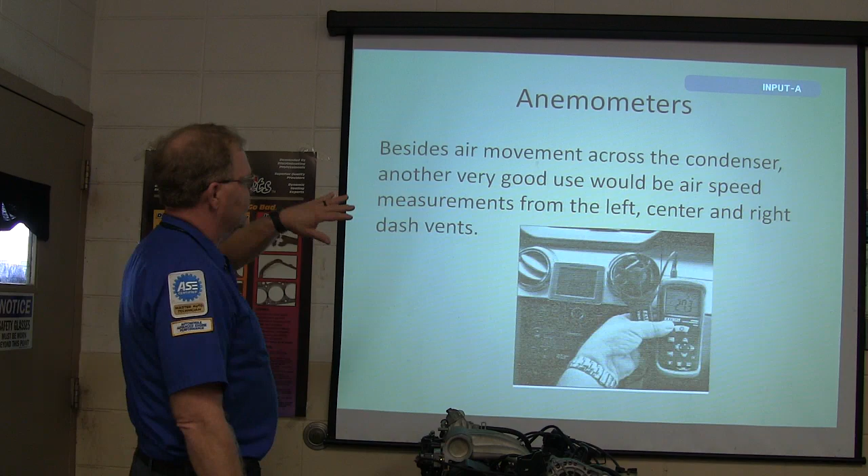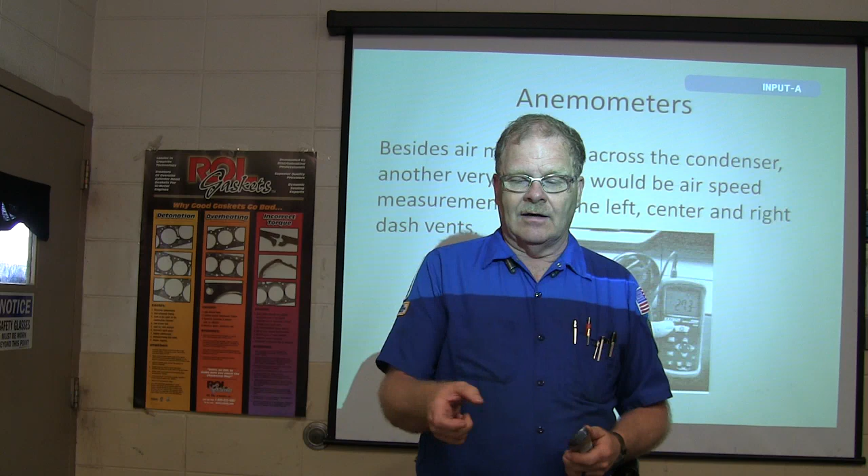An anemometer is a device that measures wind speed. Costs about $100. They're really common in the commercial refrigeration industry, but you hardly ever see them in automotive shops. I do not have one of these. Besides air movement across the condenser, another very good use would be airspeed measurements from the left, center, and right dash vents. If you think the condenser is partially stopped up any kind of way, inside or outside, if you've got a forward-looking infrared camera gun like we got in there, you can take pictures of it and you can see where it's cool and where it's warm. You can also spray water on it and see where it evaporates really fast. If it evaporates really fast here, but it stays wet down there, then it means it's cool where it's staying wet, okay? That's it, though.

It's like shadows. All right, because everybody should have at least 6 pages of notes. Well, that didn't happen. Okay, tell me something that you're gonna remember. Tell me something that you're gonna take with you from this. Work smart. Don't overcharge. Don't overcharge. That was at the very beginning of the thing. At least he listened. Did you pick up anything? What about you, Tim? Fix AC, I got that one right. Tim's done a whole semester's worth of work on that Jeep. That's what I was gonna say, check everything, write it down and take pictures. Yeah, make darn sure.

Now, where are you at on the Jeep now? Air conditioner, everything works, ain't got the radio working. The radio won't work? Do you know if it was working before? She says she thinks it was. I'm pretty positive it was working. Well, that's a crummy deal, so we gotta find out why the radio's not working. Oh, and there's a 20 amp fuse, the one I replaced the other day under the dash, and that power control module. I have no idea what it does, there's no diagram. That's the only year and model that power control module is used in. Nobody has a diagram. Well, we'll find out. Did you replace that fuse? Yes, and then when I hooked the battery charger back up, it popped. So you've got a dead short somewhere, okay.